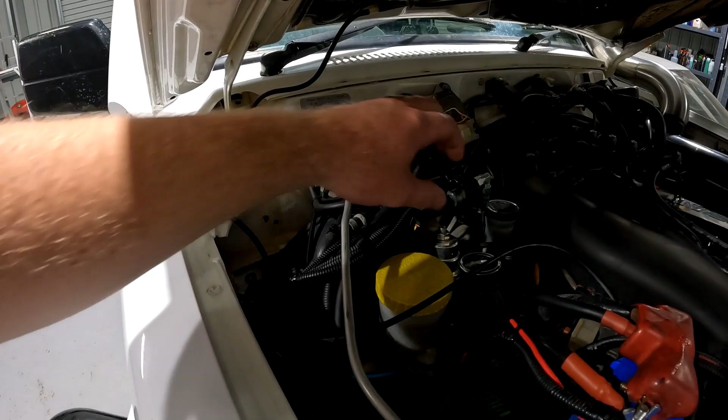But quickly, before we get into the dyno, I'm just finishing a few last things, but I'll show you the latest on this. I've done a few little things and got some things done in preparation for the dyno and the upcoming trip. So we'll quickly smash them out. So I've managed to chuck in the oil pressure sensor. That's all wired in and working. This is a little bit messy here, but this is all getting cleaned up soon. And this is sort of just a temporary spot for it. I'll find a better spot soon.

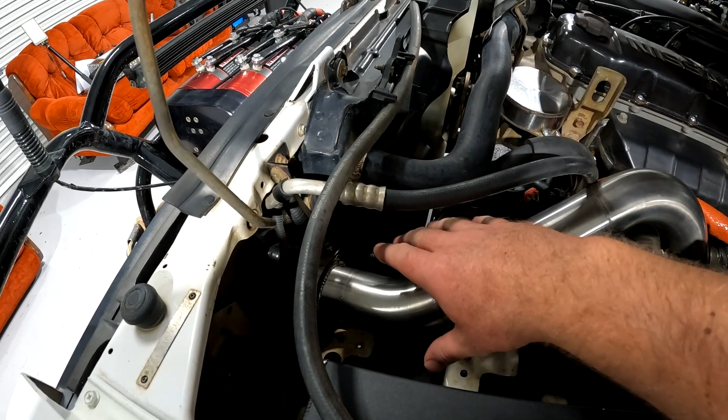So with the new turbo, the cooler piping was slightly too short. It was sort of on the edge. So I got this cut off and extended a little bit. I also had like a provision for a blow-off valve that I used to run years ago that I don't run anymore. So it just looks a lot cleaner now, extended and without that little provision there.

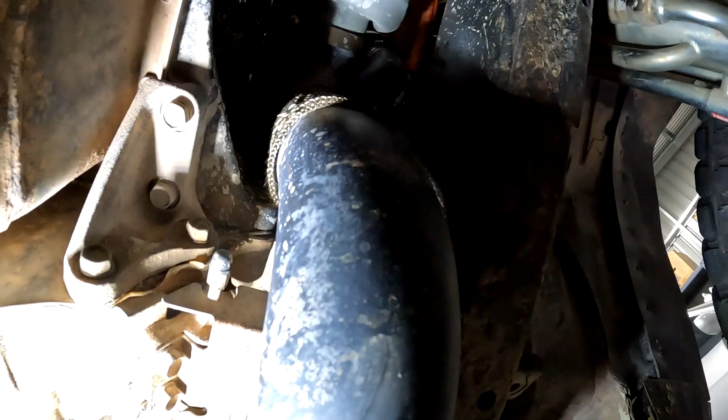The dump pipe's all done. So this is the external gate exhaust pipe. You can see it's got a little flexi joiner in there. If you're using a flexi joiner in the dump pipe, these ones are the one to use. You can't use them woven stainless wire ones because they do collapse in, which did happen to me. You can't really see the dump pipe, so I'll jump underneath and we'll have a quick look. So you can see the dump pipe there. Come up pretty nice and clean. I've already driven this through some mud, so it looks a bit dirty.

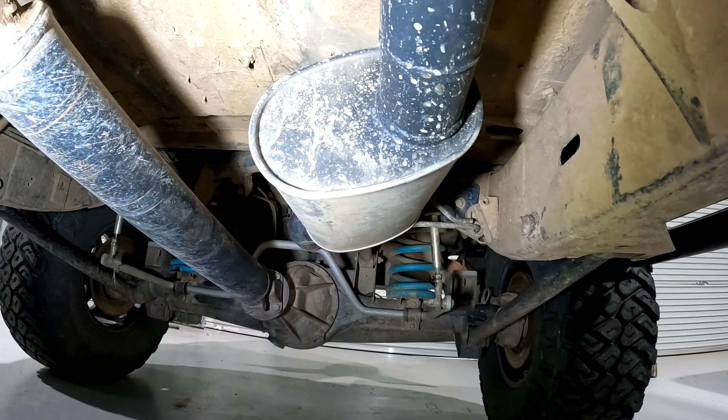We've also replaced the muffler with a little bit smaller one. The one that was on there was pretty big and it was smashed up. So I decided to chuck a smaller one in there. I also wanted it to be a little bit noisier. So this should sound pretty good.

I've also made a bit of a plate up just to mount the ECU. This was all just shoved in here and the carpet went over it and I just forgot about it. It is not quite finished yet. I just got to finish tying some stuff up like all this, but that should be nice and neat when it's done. And I've put some sound deadening and some carpet underlay behind it to protect it from the heat of the firewall. So it's not quite ready for our Easter trip, but it is ready for the dyno.

It's going down to the usual place down at Independent Motorsports. The guys there, Stuthy, he's tuned my cars for years. I think he first did my original Skyline in like 2012. So that's over 10 years he's been tuning my cars. He's done this car a fair few times, even back in 2016 when I first turboed it. He tuned it and he's done the race car and all sorts. There's plenty of dyno videos I've put up.

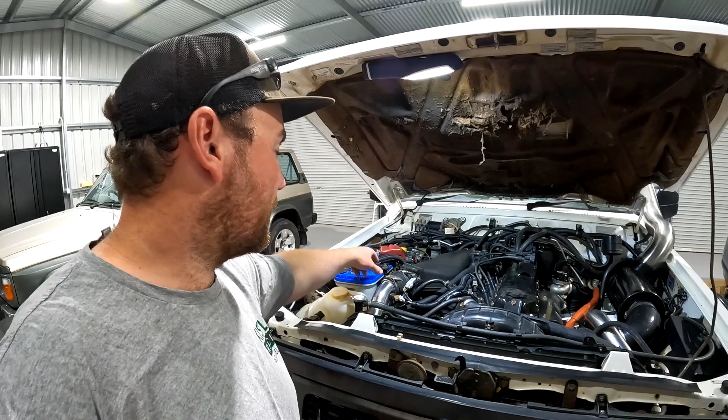I run an RB20 top half intake manifold that runs a throttle body on the front, so it's just easier for intercooler piping and access to injectors and spark plugs. This intake manifold does not work for the TB45. I've had this question a lot. The TB45 is one piece, and the TB45 and TB42 intake manifolds aren't interchangeable. So if you've got a TB45, you can't do this.

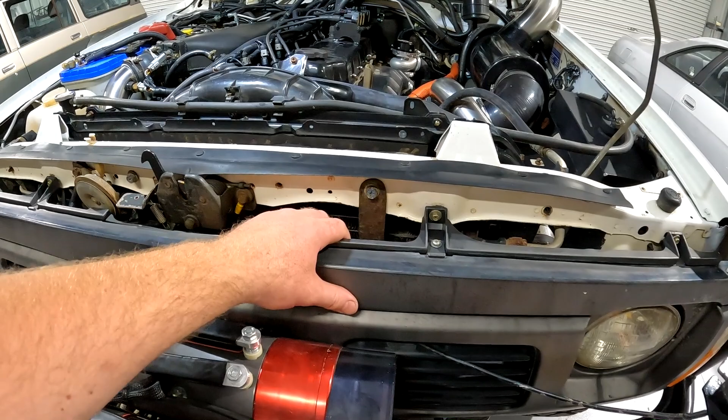We're running Bosch 550cc injectors. They just directly go into the rail with the rail adapter, 11 to 14 mil rail adapter, and then we've got plug adapters, so it's a complete bolt-in. Front mount intercooler hidden in the front here. It's a 300 by 600 by 76. We're running a Haltech Elite 750 ECU, which is why we're able to run the LS coils, the direct fire ignition, which also runs an electronic boost controller, and we also run the wideband in the dump pipe as well.

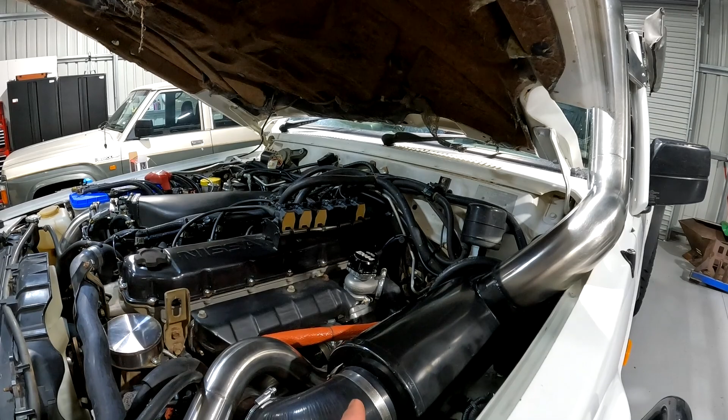We run an Aquamist water methanol injection system, so that's where it gets injected there, straight into the intake after the intercooler. It's the same water meth kit that I run on both cars, and Independent Motorsports know how to set them up. They stock these kits, so if you are looking to go water meth injection, they are the guys to see.

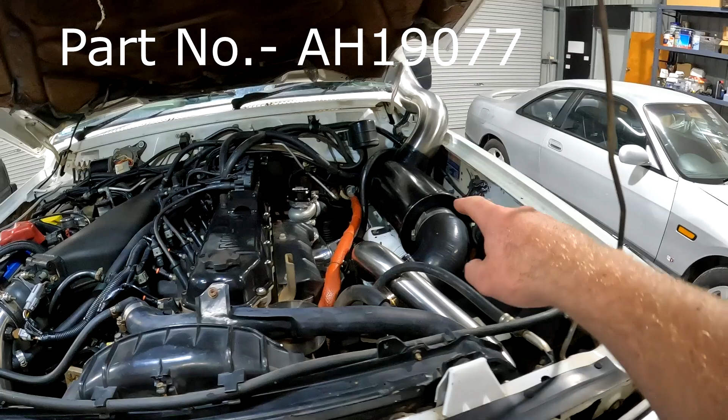I've got a ProFlow fuel pressure reg, which is rising rate, and then I've just put a gauge on it, just in case you need to diagnose something. It's got a Fleet Guard airbox. We're running a factory Nissan TD42 turbo manifold, and then I've just had the wastegate welded on there on top. That's a GFB 44mm gate. And then we're running a Hypergear ATR 43 Pro S model turbo. It has a 0.82 rear housing.

It also has a ball bearing core and a couple other things you can option when you buy those turbos from Hypergear. Massive thanks to Teo at Hypergear for sorting that turbo out for me. It's pretty similar to the one that's on my race car. It's just a slightly updated model and slightly different size, so it should make some good power.

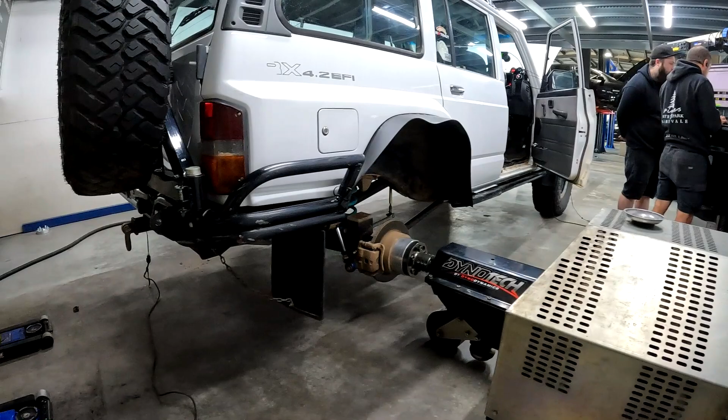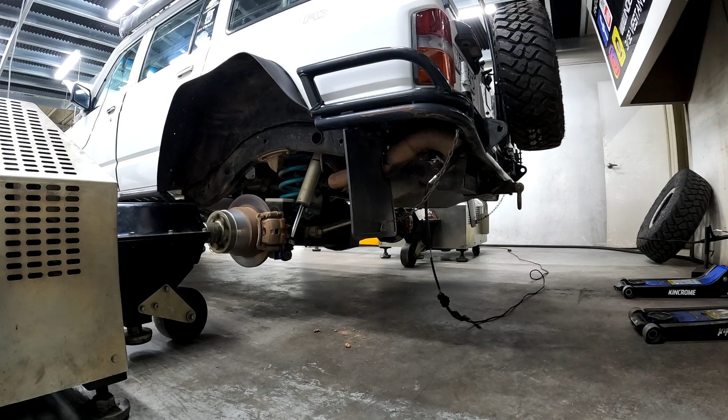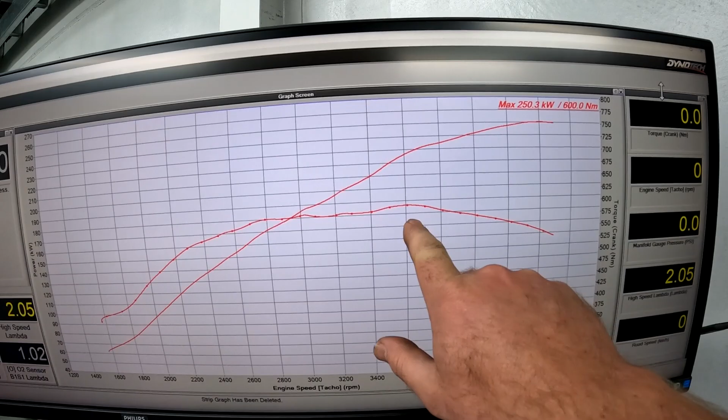For reference, this is what it's making now. You can see it peaks out at 250 kilowatts up here, and it peaks 600 newton meters of torque at about 3600. And then the boost slowly ramps in. We'll sort of peak boost by about 2600, a little bit fatter in the middle, and then taper it off at the end.

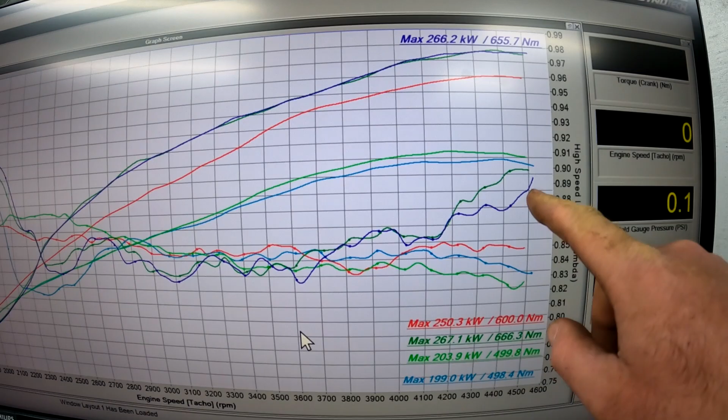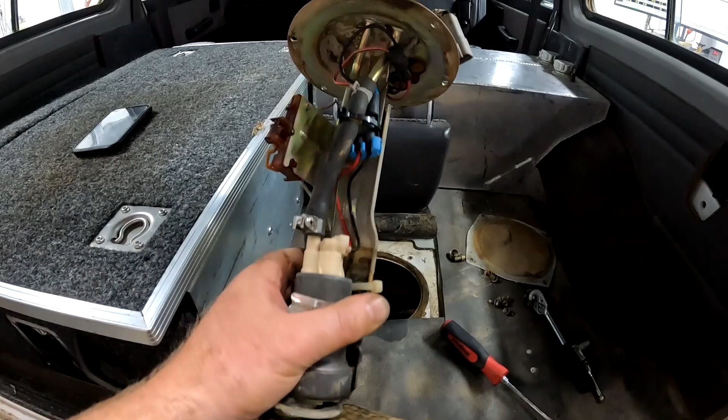So this is a dyno graph with power and air fuel ratio, and you can see it was leaning out right at the top, so we did have a fuel issue. So we pulled the in-tank fuel pump out just to check the wiring, the pump itself and the gauze filter, just to make sure there wasn't any immediate problems that we could see. We fiddled with the fuel pressure regulator and we found that winding more pressure into it didn't actually do anything. It didn't show any more on the gauge.

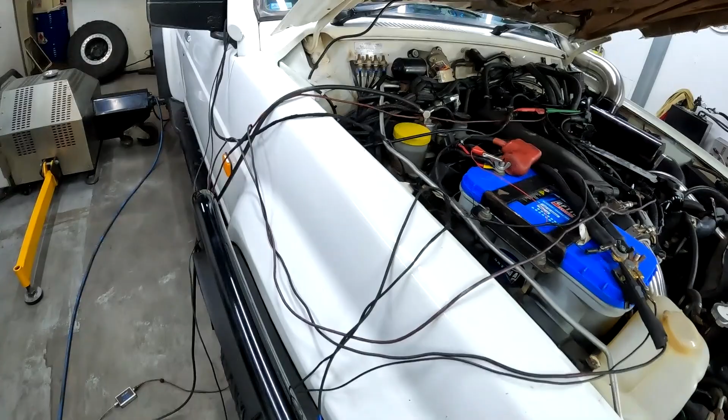We then hooked it up to the fuel system analyzer just to make sure what the problem was, and we found that when we increased pressure, it decreased flow. So after checking the wiring, the hoses and everything, we diagnosed it with a bad fuel pump. So we pulled the pump all the way out and threw a Raceworks 340 in. With the new fuel pump in there, the pressure regulator actually went off the dial. So yeah, we adjusted it back to what it's supposed to be, and it's back on the dyno, ready to go.

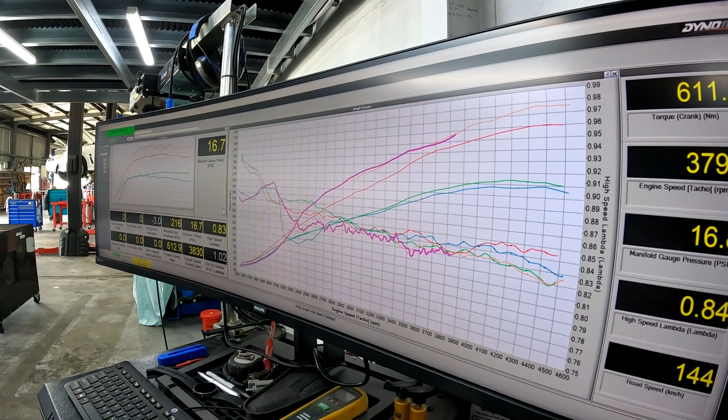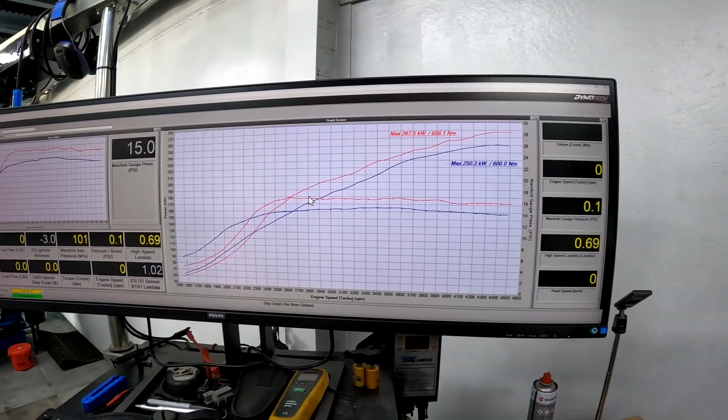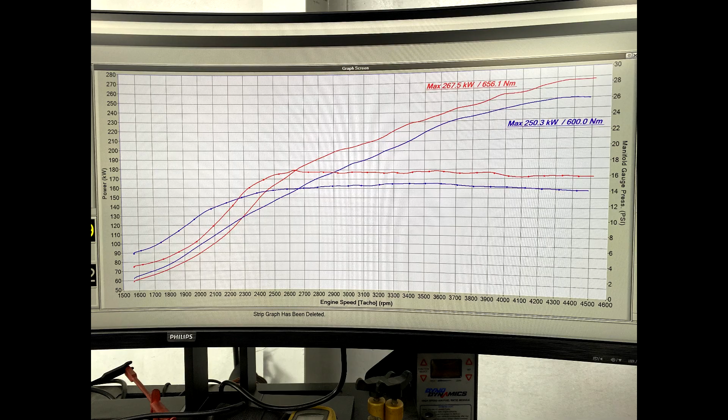So this is before and after with power on the high line again, and then the dotted line is actually boost pressure, which is read on that right hand side of the graph. So if you look right at the start at the low RPMs, we've lost a maximum of 200 RPM in spool, which is going to be virtually unnoticeable. You can see the power line, they're really not that far different. We are running about an extra 1 to 2 pound more boost.

It peaked at like 17 for a split second, and then for most of the run it's the high 16s, and then right around 3900 you can see it drops off nearly a pound at the end there, which gave us a 267. So if that line held all the way through consistently, it would have made mid 270s, but that's just a little bit more refining needed on the boost controller right at the very top. But the good thing about the closed loop boost control with the Haltech is that it does have a self-learning function. So the more I drive it, that will flatten out nicely.

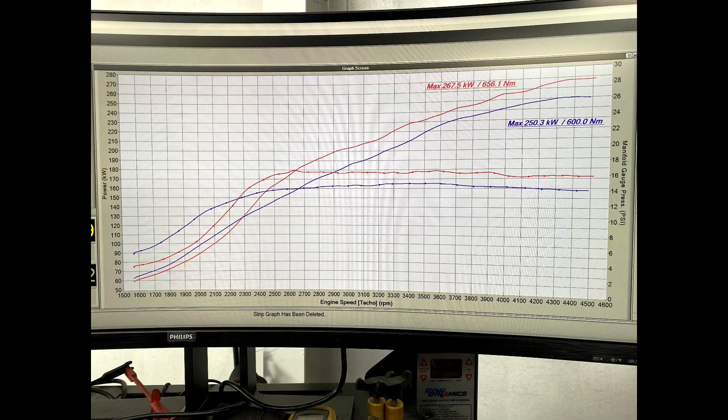Just on the drive home, I can already tell the mid-range is heaps stronger. It comes on a bit harder, but you can feel it just pulls like a freight train through the mid-range, which is exactly what I was looking for. Just in that rev range between like 2,000 and 3,500, it's just absolutely awesome.

It did take a bit longer than first expected. The last few dyno runs, even with this car years ago, and the last few with the race car have been pretty straightforward, pretty quick. But as you've seen just before, the fuel pump problem sort of held us up, and then diagnosing it. So it took a few hours longer than first expected.

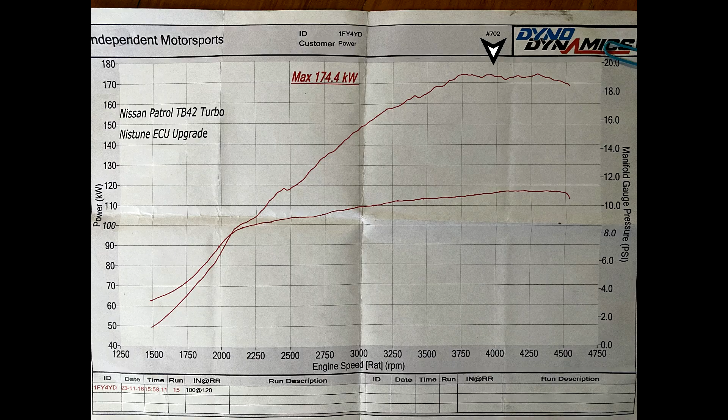Now this is just with a Nistune ECU, so very basic, normal ignition stuff, nothing fancy at all. You can see the boost right up at the high RPM peaks at about 11 PSI, and then power peaks at 175 kilowatts. And then if I flick over to the dyno sheet from today, which shows no water meth injection, so this is like the base tune with the water meth turned off. This also peaks at 11 PSI. Ignore the lower line, that's torque. The other sheet didn't have torque. So if you look at the power line, it peaks at 205.8 kilowatts, so 206 kilowatts. So there's a difference of roughly 31 kilowatts.

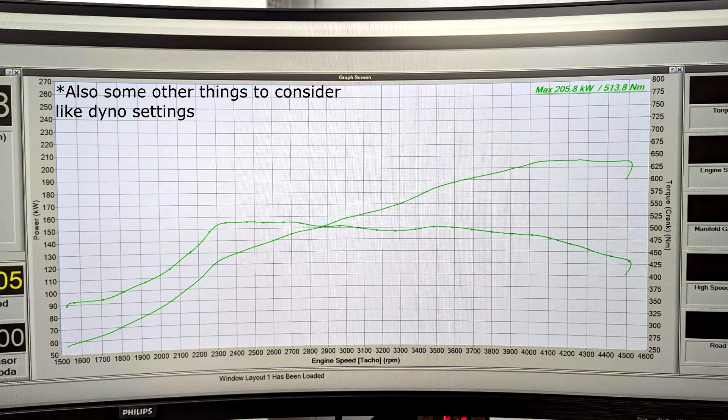And then what you've got to also consider is this is with the new turbo, and it's got a Haltech, and the LS coils and the forward facing plenum. So we've had a couple upgrades. So at a difference of 31 kilowatts with some upgrades, it seems like 30 kilowatts is like the absolute max difference between the wheels and the hubs in my case. So at the end of the day, just having a wild guess, I would suggest that it's probably around 220, 230 kilowatts at the wheels, but I really don't care. I'm just worried about what the curve looks like and how drivable the car is. But so far, it's been some impressive gains. I can't wait to get it out on the tracks.

So I hope you enjoyed this one. I know it's just me talking a lot, but I'm super pumped on this. I love dyno days. I love the numbers, and I love looking at the torque curve and all the different data. I just fiend that sort of stuff. But we're one step closer to getting ready for Easter, which is coming up real fast. It's like 2 weeks away. So I've got a couple small jobs to do to the car, and then just a bit of a once over, and then we're gonna pack, and then it'll be time to leave.